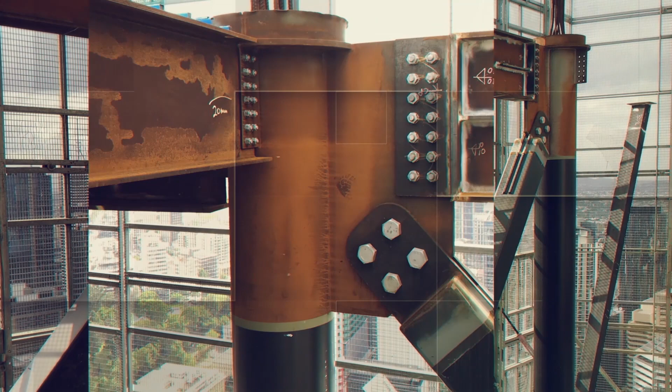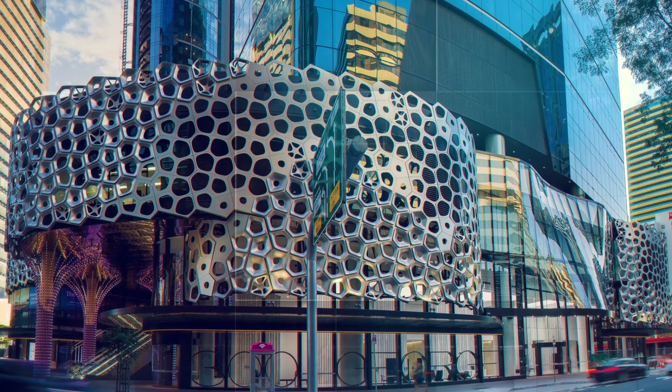300 George Street. This standout project forms part of the landmark $1 billion Brisbane Quarter multi-use development. The structural steel frame tower utilised 2,600 tonnes of structural steel and 50,000 square metres of Bondek. The huge 100-tonne megatruss was engineered to provide the answer for lateral stability. As the tallest structural steel framed high-rise tower in Brisbane, it's a significant project in showcasing the benefits of structural steel framed towers to the Queensland market.

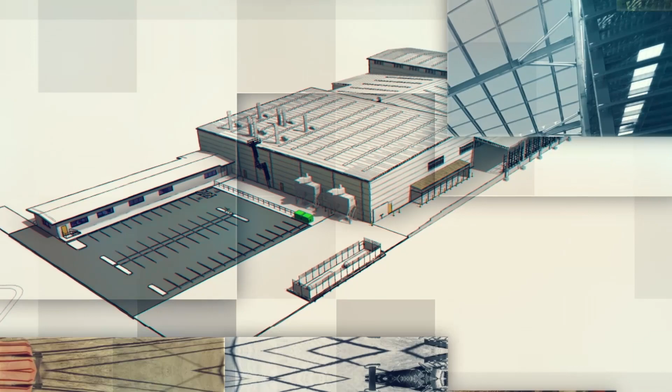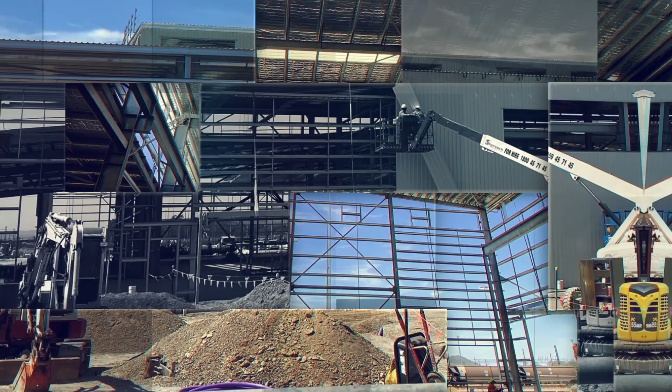Aurizon Jilalan Rail Maintenance Facility. The facility is used by Aurizon to maintain their fleet of rail carriages. Innovative design concepts calculated a 45% saving in structural steelwork, equating to approximately 300 tonnes. Where possible, transfer beams were used as a strut for the roof bracing system, rather than installing an additional strut directly above the transfer beam. 3D models ensured safety in construction via the visualisation of the frame in a virtual space.

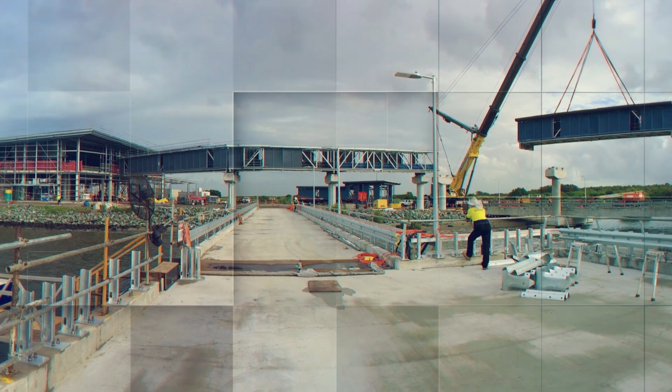Brisbane International Cruise Terminal. The new cruise terminal has been designed to cater for the biggest cruise ships in the world and is a vital pillar of Queensland's tourism industry.

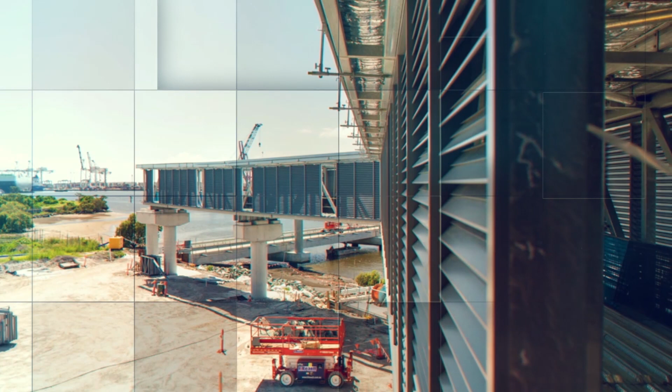The terminal is an elegantly designed structure with a covered walkway from the passenger drop-off area into a large open covered plaza. The building's brief was to minimise working at heights over water during the installation phase. The lightweight steel truss modular design was developed to enable spans to be fully built on ground, complete with louvers, roofing system and glass.

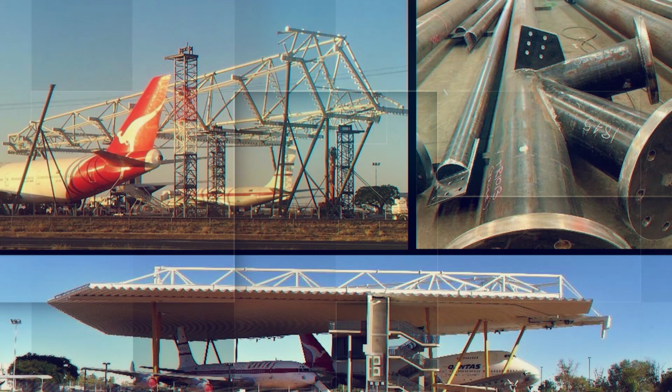Qantas Founders Museum, Airpark Roof. Given the harsh environment of Western Queensland, it was decided to provide coverage to preserve the vintage aircraft. The Airpark Roof covers an area of 8,000 square metres, half as big as the Sydney Cricket Ground, and used steel screw piles for foundations.

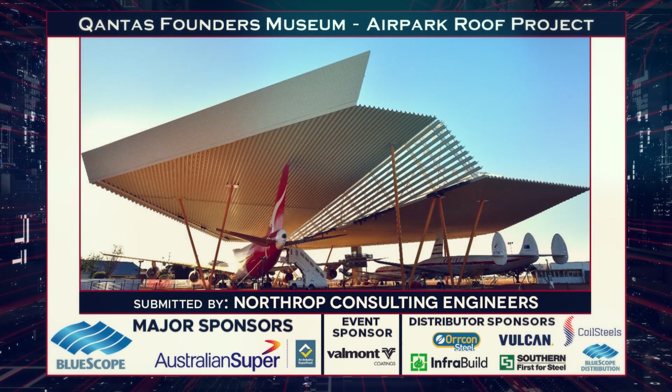The 400 tonnes of fabricated steelworks were erected around and directly over the existing Boeing 747 and 707. This impressive airpark roof is 26 metres high, 90 metres wide with a truss span of up to 78 metres.

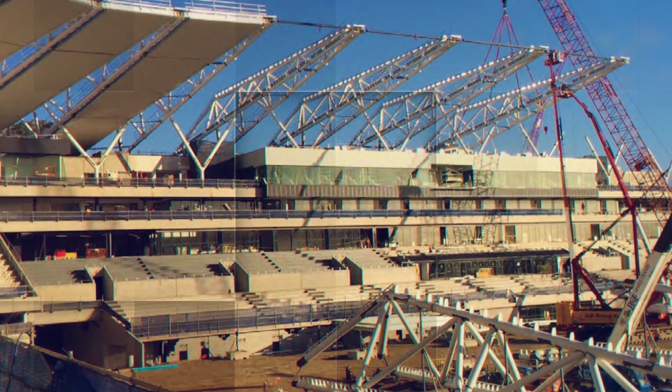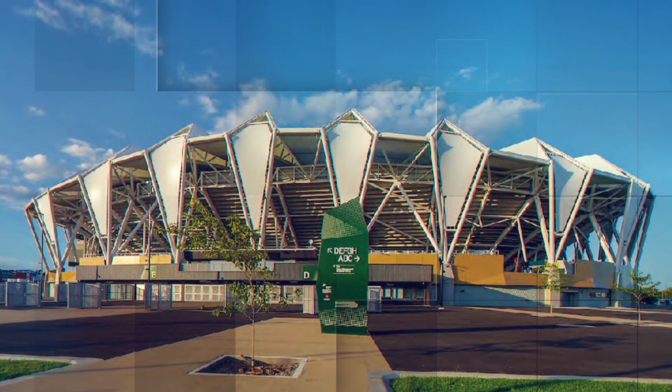Queensland Country Bank Stadium. The success of the spectacular new $250 million stadium is underpinned by the strength, elegance and buildability of steel. The stadium's roofline looks deceptively simple due to its streamlined visual consistency, the result of complex, geometrically driven, cost-efficient design solutions honed using parametric tools.

The steel-framed western stand, which houses facilities over 5 separate levels, was cleverly designed for rapid, unpropped erection, expediting the building program.

Queensland State Netball Centre. Located within the QSAC campus, the centre includes 8 indoor courts, offices, gym, high-performance centre, food outlets and broadcast facilities. Also included is the Nissan Arena, boasting a 5,000 seat capacity.

The usage requirements were instructive to the structural form, which was optimised for the large spans and clearances over the show courts. The spacing of the roof structure utilised the full capacity of the prefabricated roof framing and greatly improved the speed of construction.

St Patrick's College Arts Building. The new contemporary performing arts, library and learning precinct features an 800-seat performing arts auditorium, a state-of-the-art library and 9 classrooms. The complex, irregular-shaped building has 2 distinct structural systems.

The learning precinct consists of 2 levels of post-tensioned concrete slabs with a lightweight steel roof, and the auditorium, which is a 3-storey steel portal frame structure. The entire building is then wrapped in a steel-framed veil.

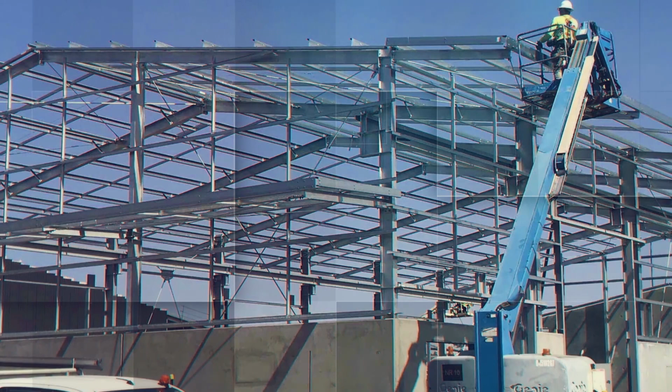Toowoomba Regional Council Principal Depot. The Principal Depot consists of 7 portal frame industrial buildings, as well as covered parking structures, walkways and material storage areas. These buildings incorporated approximately 1,000 square metres of suspended, steel-framed mezzanine floors.

A unique aspect of this project was the variety of steel-framed buildings. These ranged from bays utilising portalised UB rafters with SHS columns to a 5,000 square metre warehouse with a 17 metre span gantry crane.

The judges awarded a high commendation in this category. The high commendation is awarded to 300 George Street.

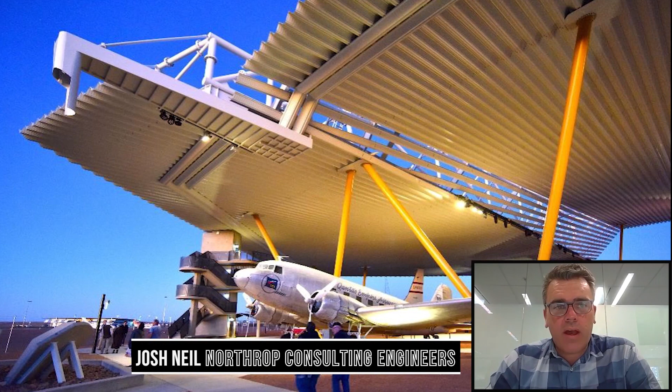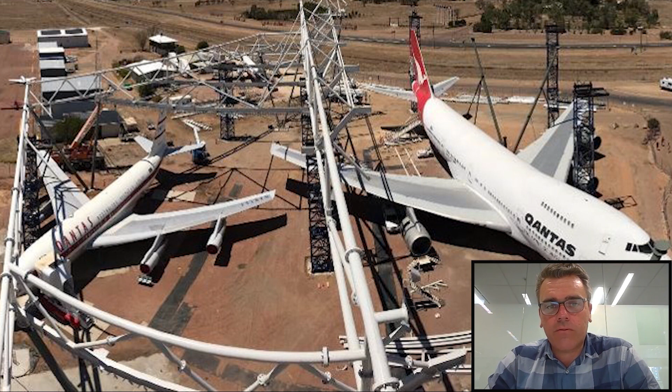I'm incredibly proud of the legacy of this project, protecting the proud heritage of the founders of Qantas. The 8,000 square metres of coverage that the roof provides significantly improves the weather protection of the aircraft displays from the heat and rain, together with the fine, efficient and elegant design developed by the design team.

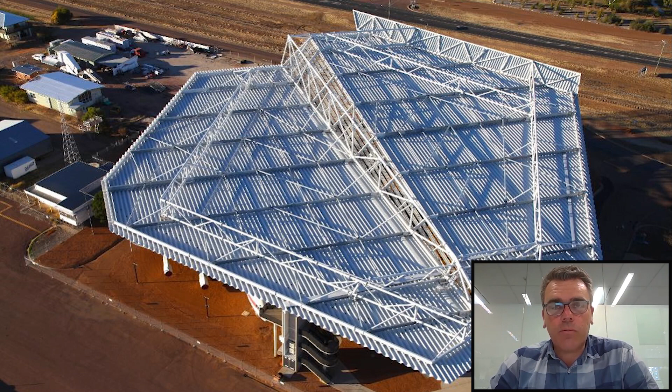Steel was the right solution for this project from the outset. The ability to free span across 4 aircraft, including a Boeing 747 and a 707, was enhanced by the use of steel. Northrop worked particularly closely with architect NRA CoLab to enhance the functionality and geometry of the structure.

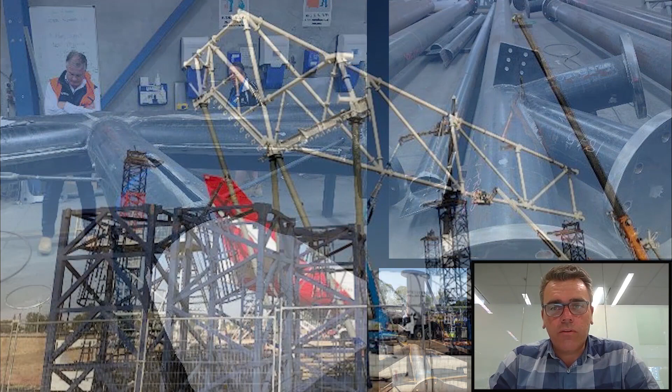Wappak Steel CAD and Bentley Steel were exceptional in their ability to assist in the coordination of fabrication through virtual workshops. The ability to prefabricate and assemble such a large structure in a somewhat remote location was enhanced through the use of steel.

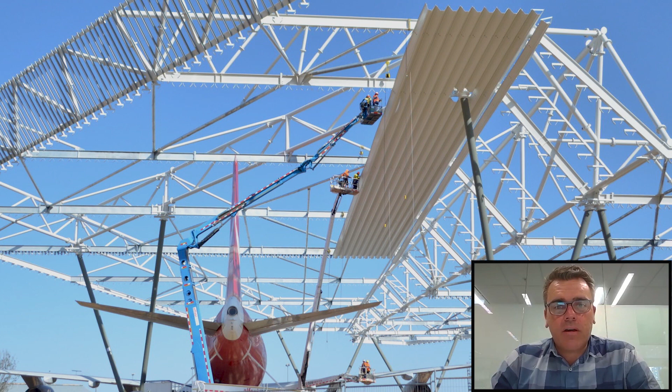Steel's durability and strength have enhanced the column-free amphitheatre atmosphere beneath the canopy, enabling true appreciation of the air park. This award is fantastic recognition to the entire design and construction team, who can all hold their heads high about achieving a remarkable outcome in a remote location on an incredibly tight budget.

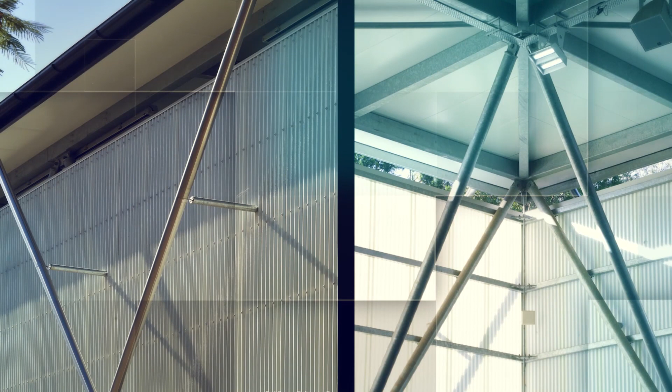Situated on a leafy ridgeline, the new structure consists of a full-size basketball court, sports store and change rooms. The building has a simple rectilinear form. A concrete colonnade surrounds the court with branching steel members, supporting a simple composite roof. Instead of a typical portal frame, the team developed an expressive and lightweight steel structure which redistributes the same mass of steel into an equally efficient but elegant framework.

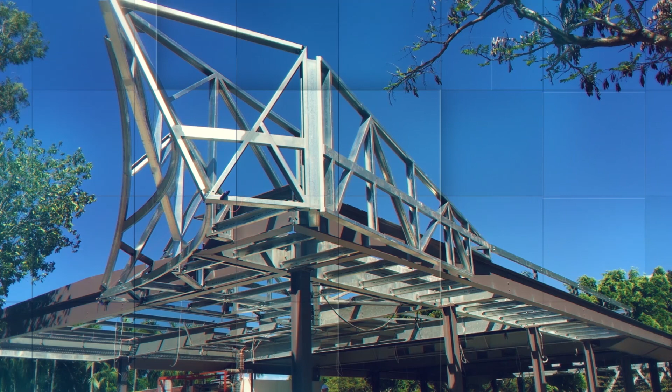Flow State. A unique 3,000 square metre urban recycling project has blurred the distinctions between landscape and architecture, theatre and public space. The short construction period necessitated prefabricated frames and bolted connections. This generated an aesthetic of robust and expressive junctions revealing the raw structure veiled by a delicate skin of expanded mesh panels. The steel frame was retained in its galvanised form to minimise cost and express the material.

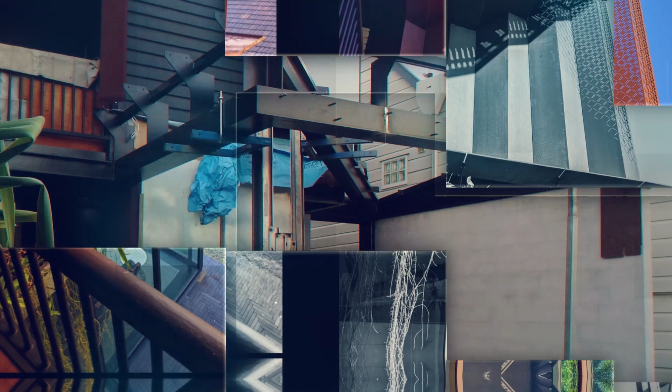Greenhouse. Inventively crafted to take an 1890s workers' cottage and turn it into a dwelling with appropriate amenity for the year 2020, steel has been integral in finding innovative solutions which respectfully contrast with the existing structure, providing a contemporary twist. The attic roof is reinforced with a steel gable, featuring a steel plate awning projecting outwards. The main staircase is constructed from 10mm weathering steel and allows for a unique horizontal cantilever to form the stairs mid-landing.

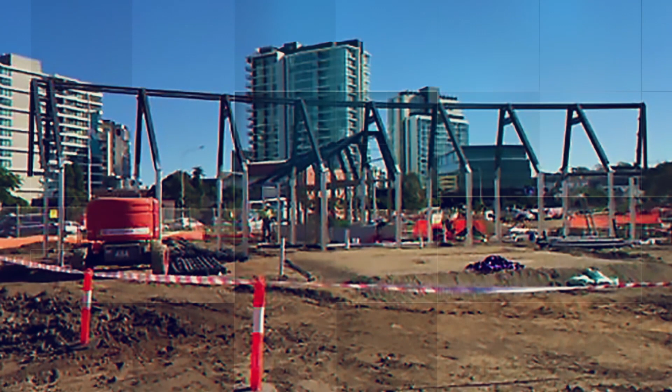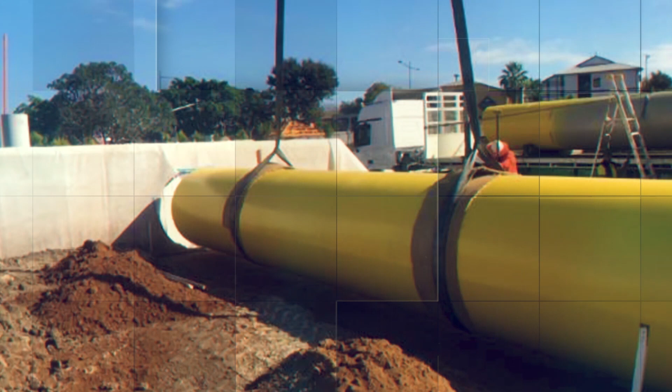Hercules Street Park. The playground's theme incorporated two unique steel parts, rarely used in traditional steel structures. These included modifying 3 shipping containers into an open, freestanding structure which would allow a jungle gym-style play equipment fit-out. In addition, 2 containers were stacked as one, with a truss-style gantry walkway to the upper layer. The second element was 2 imitation cyclone extraction cylinders, which were used to mimic real cyclone extraction cylinders installed in nearby industrial complexes.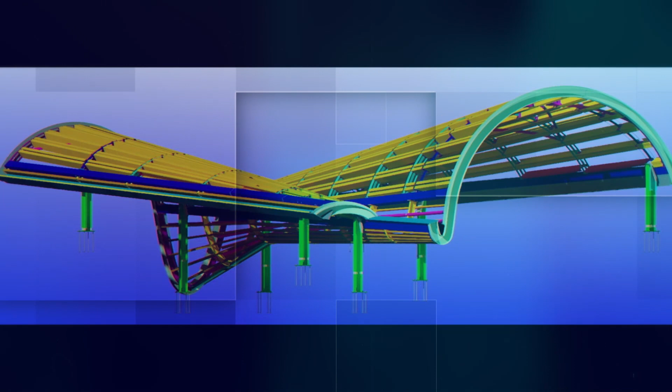JCU Central Plaza. An extremely complex wave-shaped covered area has been realised for the residents of the Townsville Campus University. Hot-rolled and cold-formed steel created the primary structural skeleton of the structure, while some members were substituted for a composite fiberglass product for member suitability. As part of the detailing process, consideration was given to the assembly of the roof structure in 2 parts, so each part was fabricated and assembled and then lifted into situ. The result is visually stunning.

St Joseph's College Stage 1. The single-storey steel-framed classroom buildings sit as lightweight clad pavilions in the landscape, referencing agricultural sheds and speak to the semi-rural language of the site. The design, detailing and construction methodology resulted in each building being framed, roofed and clad in a matter of days. Wide-span steel roofing has been utilised on the 3 larger 2-storey buildings as an architectural signifier, which denotes the front of the site and creates a defined architectural statement.

The judges awarded a high commendation in this category. The high commendation is awarded to Flow State. Congratulations, Flow State. Well done.

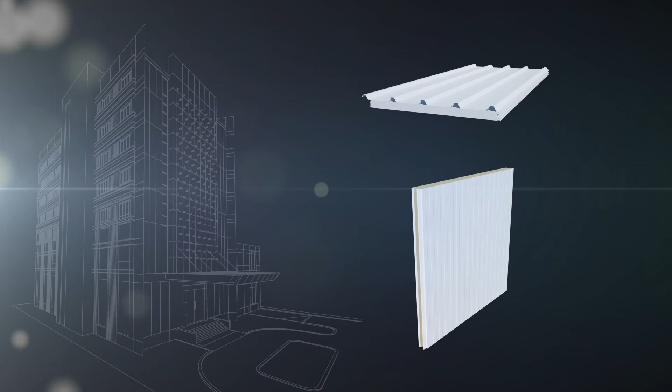Our next category is steel-clad structures. The shortlisted entries for the steel-clad structures category are Ambrose Tracy College, Francis Xavier Centre.

Sustainable design is addressed through the use of passive design principles of orientation, ventilation and natural sunlight. The external skirt wall cladding is set off the ground and stops just short of touching the roof. This allows for natural breezes to pass through the building and for the rising hot air to be naturally ventilated out. The roof is constructed with a composite panel, intentionally low profile with a plain white soffit, providing a uniform backdrop which expresses the steel roof structure.

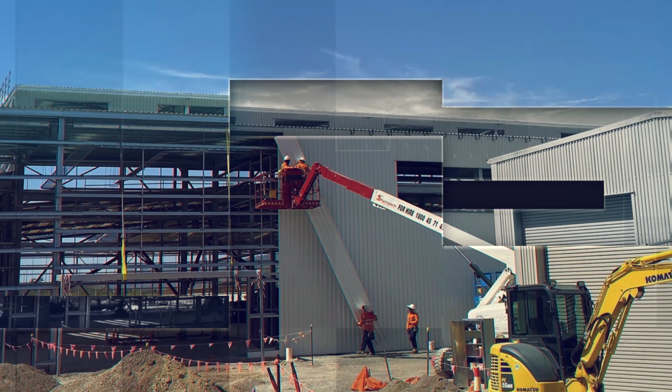Aurizon Jilalan Rail Maintenance Facility. This 7,700 square metre facility, located in the Mackay region and valued at $21.5 million, has been constructed for rail wagon maintenance. The primary building structure is steel portal framed with full height cladding around the perimeter. The entire structure contains around 250 tonnes of Australian structural steel sections, 100 tonnes of cold rolled purlins and girts, plus 55 tonnes of roof and wall sheeting.

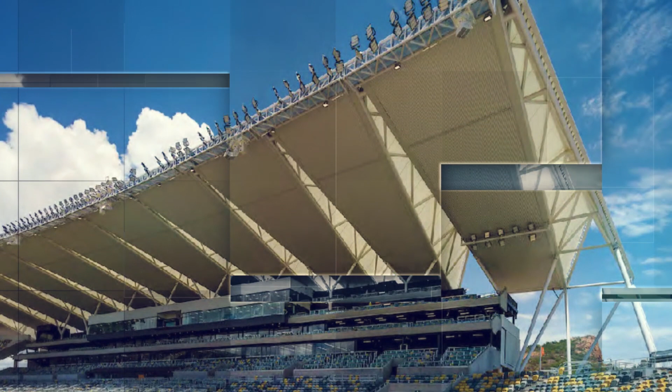Queensland Country Bank Stadium. The stadium is an outstanding community asset for North Queensland, which exemplifies best practice engineering, architecture and sustainability. Central to the concept was an undulating cantilevered roof inspired by the local mountain ranges. The undulating roof, with the form of its main structural components inspired by the leaf of the emblematic pandanus tree, was to sweep over the main western stand, the south and east grandstands, and then extend toward the city centre to form a welcoming and shaded entry.

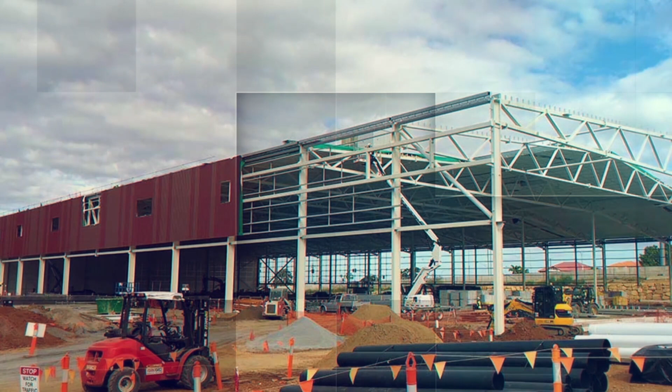Queensland State Netball Centre. The roof form allowed for the large clear height and spans required over the show courts. The roof pitch was increased over the rear courts to reduce the building height to the rear of the building. This achieved the desired architectural form to this elevation and also limited the area of building facade. The prefabricated roof and wall units included the subframing, exterior cladding and internal linings, reducing construction time and minimising the amount of work required at heights.

Red Hill Cinema. The project outcome was to rejuvenate the original 1920s Red Hill Cinema site back to a modern state-of-the-art local attraction.

Considerable engineering skill was required to incorporate the existing structure into today's building requirements. The FlameGuard steel-skinned wall cladding with its mineral wool core was also used on the boundary walls, providing sound absorption qualities to meet the operational requirements of the cinema complex. These provided the perfect canvas for a range of exciting modern street art.

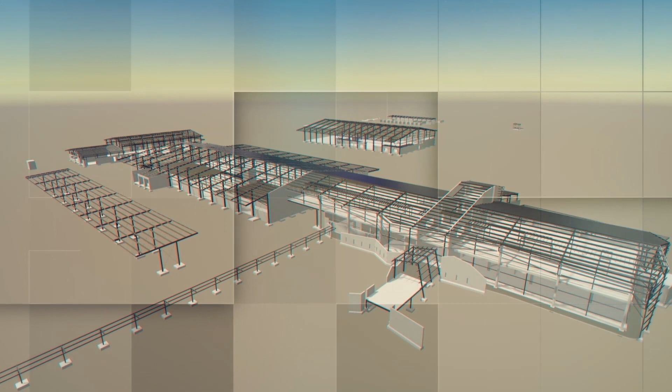Toowoomba Regional Council Principal Depot. The depot was required to replace TRC's current ageing facilities and will provide a safe working environment for the 500 staff based at the depot.

The feature screening for this building really provided the architectural spark the client was aiming for. This involved heavy coordination throughout the design process and during construction between all members of the design and construction team. The architectural feature screens and building approach features were constructed entirely of Australian steel, providing the architectural spark and wow factor for the project.

Willawong Distribution Centre. Completed in June 2020, this project provides cross-dock storage facilities for 20,000 pallet spaces under the roof and an additional 6,000 pallet spaces of temperature-controlled areas for food products. The facility, with its accompanying office and admin areas, was also built to exceed standard quality requirements for AQIS and FoodSafe accreditation. A high focus on sustainable design qualities included smart LED lighting and water capture facilities, making this facility a 5-star Green Star rating building.

The judges awarded a high commendation in this category. The high commendation is awarded to Ambrose Treacy College, Francis Xavier Centre.

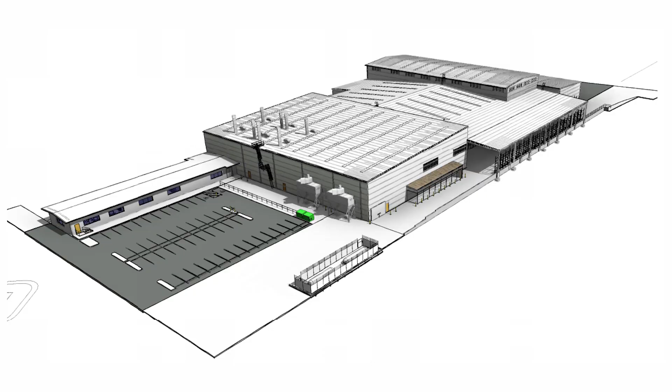Taking a step back and reviewing the original engineer's design, I'm proud to say that we managed to save 45% of the structural steelwork weight, which equated to around 560 tonnes of carbon emissions that we were directly responsible for reducing.

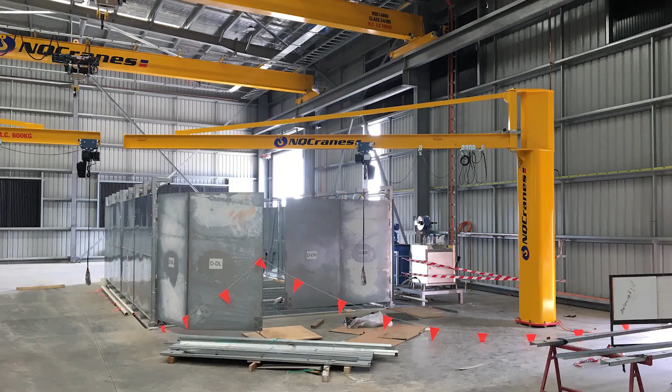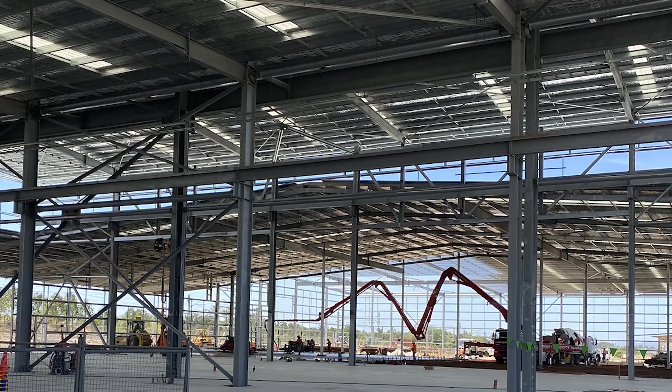One challenge was the heavy overhead gantry cranes, which put some serious loads on the portal frame structures. When considering the crane beams, we smartly used steel truss sections to reduce the crane beam span and adjacent portal structures to reduce the effective length of gantry crane beams.

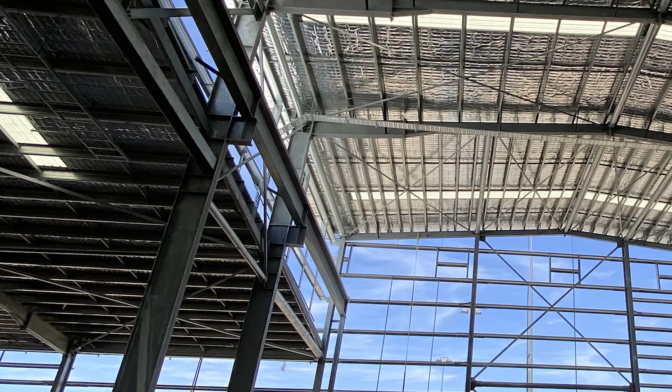This means we could use UB sections rather than WB sections. This resulted in a more efficient and innovative design than you would see in a typical engineering approach.

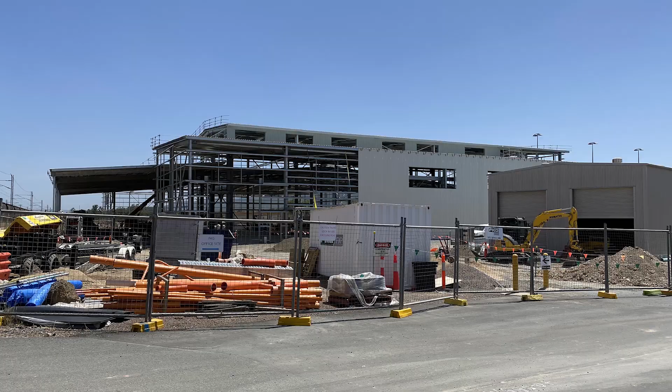We were able to work in a very collaborative and streamlined approach. So all our reviews were completed using the 3D shop model, where we would comment within the model and the detailer could then easily implement any rectifications. This collaboration with ASI Rigging resulted in approximately 5 to 6 weeks of time saved on this project.

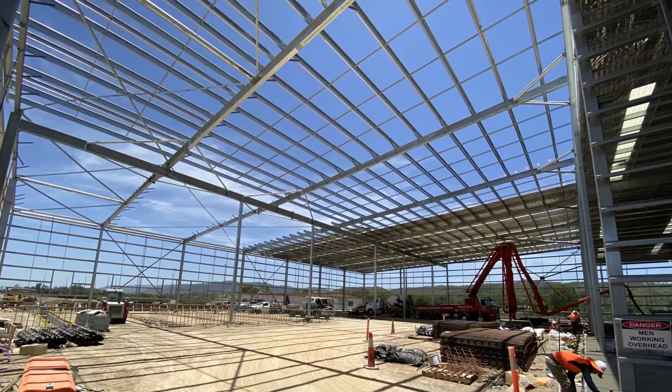The operational constraints of the wagon maintenance facility required large open areas for specific equipment to move freely within the space. So using steel as a solution meant we were able to achieve all the end user operational demands by providing large clear spans and removing the need for many internal columns.

I feel proud to be able to be recognised for the efficient value add we provided for our client ASI Rigging. Overall, the project was a collaborative success due to the implementation of innovative engineering concepts and efficient documentation processes.

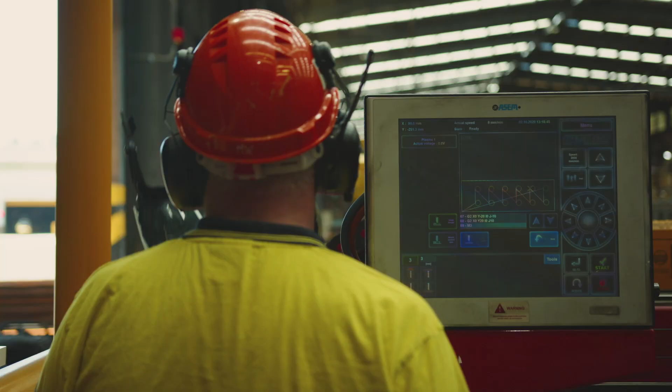Our next category is engineering projects. The shortlisted entries for the engineering projects category are AIMS Auger Mining Machine.

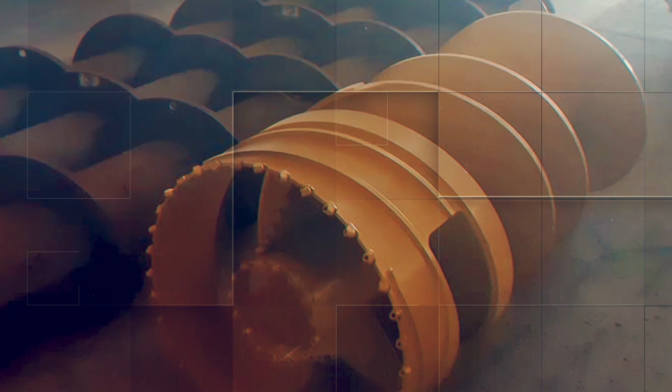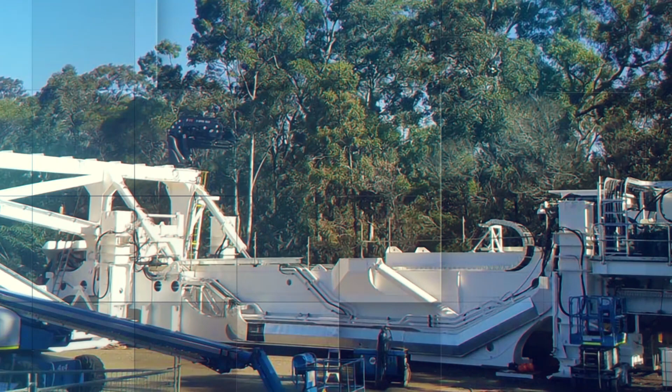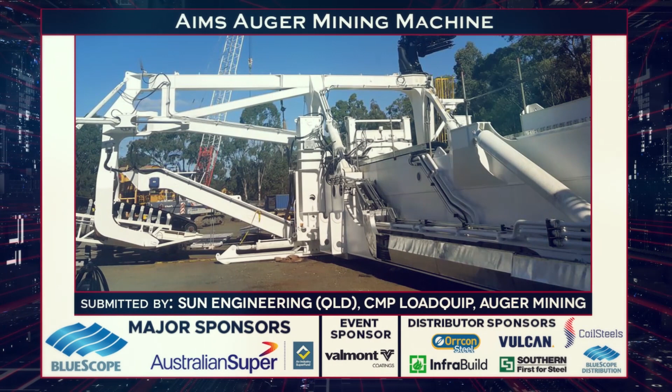The function of the auger is to mine coal on steeply dipping thick seams. Previous augers were able to mine on dips of approximately 16 degrees and 1.8 metre diameters. The AIMS auger has been designed to mine at up to 38 degrees and up to 2.5 metres. This auger is the most powerful, steepest dip, largest diameter thick seam auger ever built, and is therefore able to mine previously inaccessible coal resources at exceptionally low cost and high production.

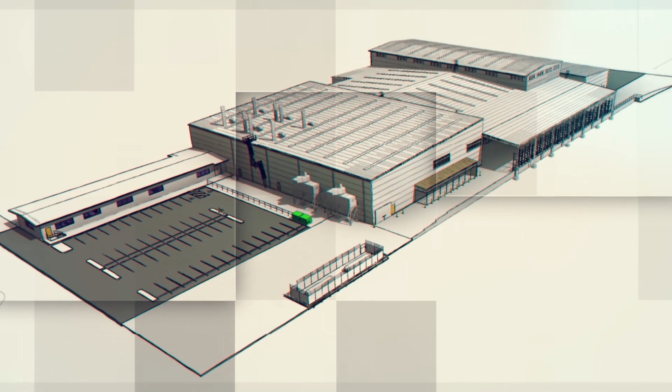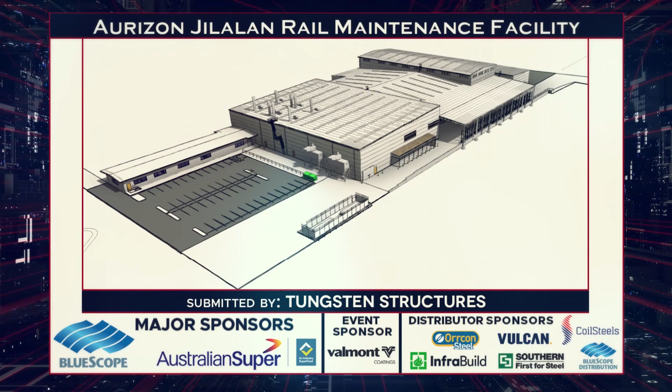Aurizon Jilalan Rail Maintenance Facility. The facility consists of a 13.7 metre high bay portal frame with two 5-ton cranes. A 20-ton crane is used to move full train carriages into the warehouse for maintenance. The facility also consists of two other 5-ton portal frame mounted cranes, with some of the runway beams spanning up to 12.5 metres. The entire structure contains 250 tonnes of structural steel, 100 tonnes of purlins and girts, plus 55 tonnes of roof and wall sheeting.

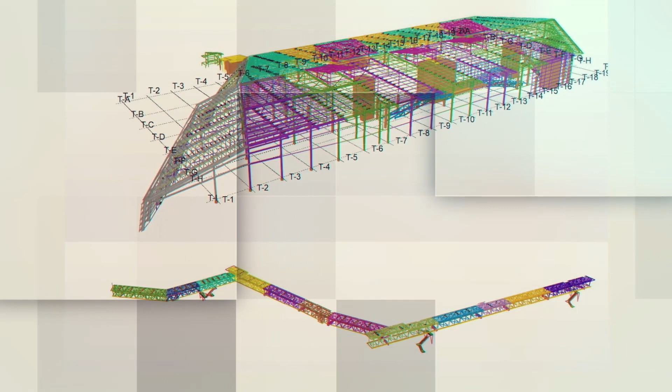Brisbane International Cruise Terminal. BIM modelling brought multiple coordination benefits to this project, from engineering design to fabrication and construction. Safe working methods statements were developed by riggers using the 3D model to ensure cranes and access equipment were positioned correctly. The lightweight steel truss modular walkway was developed to enable 12 spans to be fully built on the ground. Once complete, they were lifted into position with mobile cranes, reducing working at height by more than 90% than the original concrete floor design.

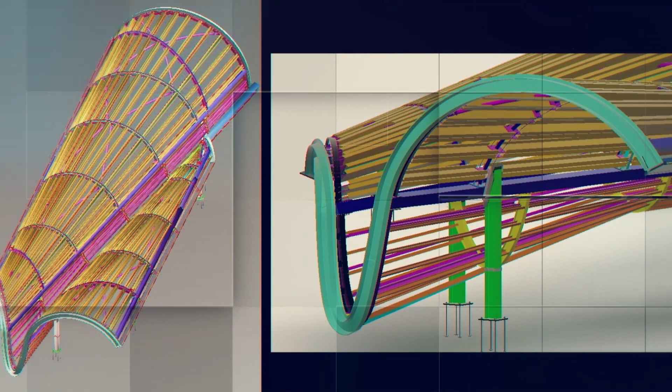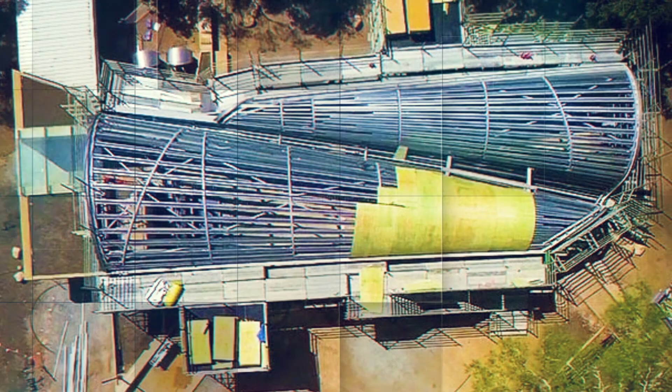JCU Central Plaza. 3D modelling was imperative to the project's success and accuracy. As part of the detailing process, consideration was given to the assembly of the roof structure in two parts on the ground, then lifted into place fully assembled. Hot rolled and cold formed steel created the primary structural skeleton, whilst some members were substituted for composite fiberglass for member suitability. The artwork was printed on panels prior to installing, requiring the precise and accurate placement of steel framing for the panels to reside.

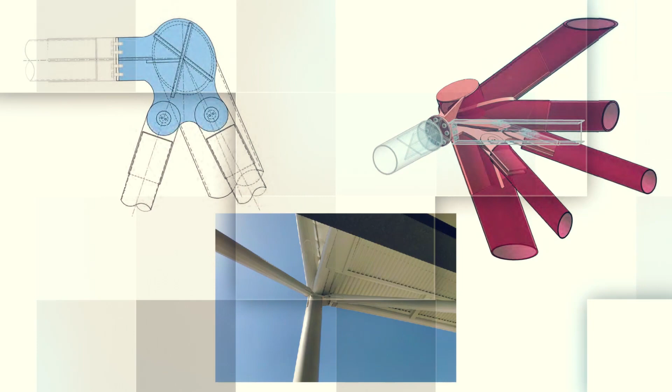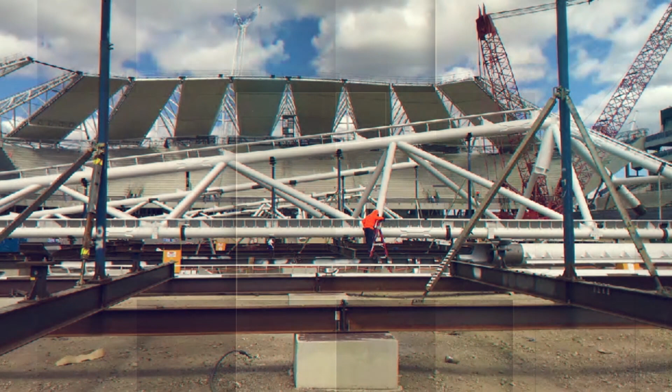Queensland Country Bank Stadium. The structural design of the steel roof demanded an innovative digital design process, backed by imagination and meticulous attention to detail. Significant innovations were introduced throughout the design and geometric definition phase of the project. These crucial innovations met the challenge of delivering the curved, twisting horseshoe form within the challenging budget and time constraints. The true merit of the roof in the building was that it had been reduced to its simplest and most logical form, resulting in a remarkable and memorable structure.

Queensland State Netball Centre.

The design was developed to achieve the architectural form and also maximise the structural efficiency of the structural steel truss roof. The roof truss profile was developed to maximise the depth over the large span and loading requirements for the show court, allowing the weight of the trusses to be optimised. The roof structure was future-proofed with an allowance for future loadings, providing the building with flexibility for possible changes in usage over time or the installation of solar panels.

The judges awarded a high commendation in this category. The high commendation is awarded to AIMS auger mining machine. Congratulations to AIMS auger mining machine.

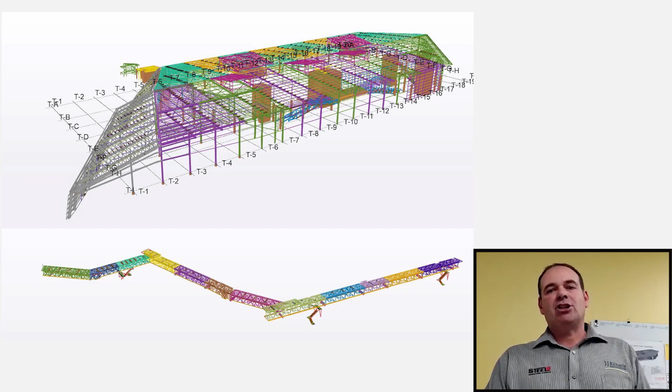Through collaboration with the builder and designers, the walkways were redesigned utilising a structural steel modular walkway system to minimise trades working at height, also enabling the walkways to commence construction prior to the wharf civil concrete works being complete. The complete walkway modules were then lifted into their final position with large mobile cranes, the heaviest lift, almost 50 tonnes, being executed from a barge.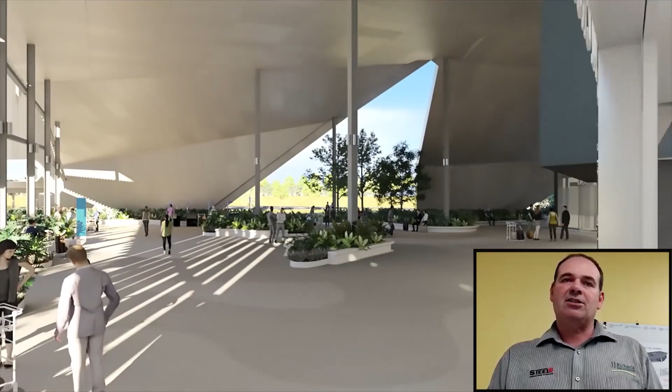This methodology reduced more than 90% of the planned working at height hours than the original tendered. The project utilised exposed galvanised steel from when you arrive to the terminal, the entry, all the way through into the foyer, where large exposed steel columns extend from floor to ceiling over 12 metres high, with glass viewing windows behind, creating a fantastic view over the Brisbane River.

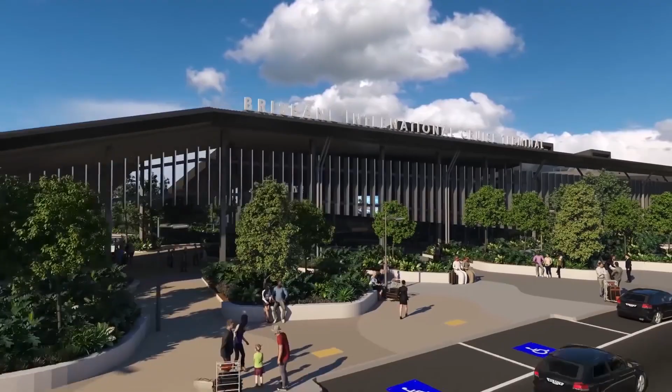Steel Fabrications Australia are privileged to have won this award, as our team and partners were involved in yet another iconic Brisbane project that hundreds of thousands of people will enjoy on their arrival into Brisbane for the next 100 years and beyond. We would like to take this opportunity to thank all of our team and valued partners in a safe delivery of this project that everyone is proud of, and we appreciate the award from the Australian Steel Institute. Thank you. Congratulations to Brisbane International Cruise Terminal.

Well done. Our next category is Young Designer Engineer Tradesperson Award. The finalists are Julian Chin from Tungsten Structures, and Jacob Dickinson from Watkins Steel.

And now for the winner for Young Designer, Engineer and Tradesperson of the Year for 2020.

Julian Chin: My dad was a builder, so I was exposed to the construction industry early on. During my final year at UQ, we were tasked with a car park design project. The problem solving, teamwork and structural design aspect of this project are what led me to pursue a career as a structural engineer. You also can't beat the pride you feel when you drive past one of the projects you have designed. My main advice to high school students would be, don't be afraid to ask questions.

If you like working on a team, problem solving, and having influence on the built environment around you, then engineering will be the career path for you. The advantages of steel which come to mind are its flexibility in design and ability to create large, column-free internal spaces. Its high strength to weight ratio is also a benefit, meaning that we can save on footing volumes when comparing a steel frame floor to a concrete floor, for example.